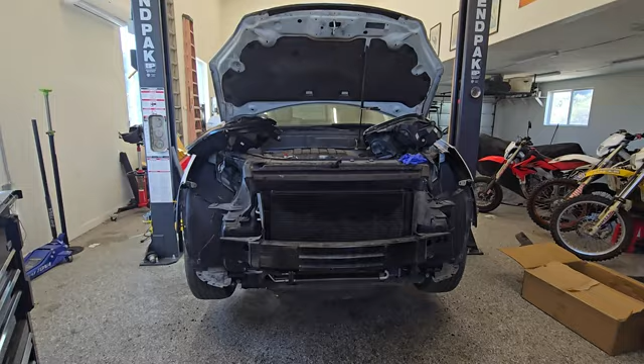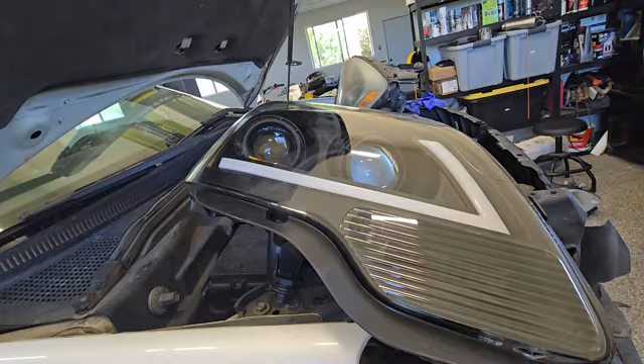This is a bit of an abnormal video for me, but I had a friend who does a lot of work, he doesn't have a lot of money, and he's got these headlights that are kind of beat, and he went and got himself some eBay lights. So I'm figuring eBay or Amazon or something like that, and I'm sure other people are going to try this.

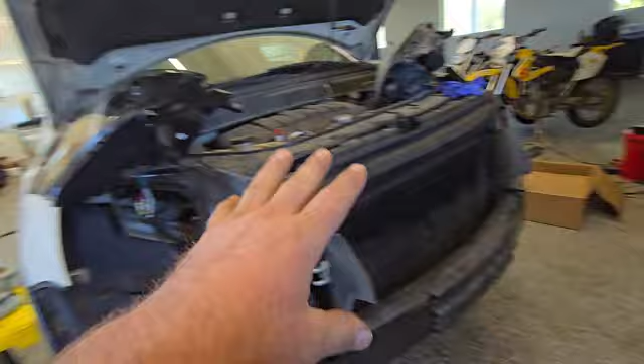Normally I wouldn't just do this and roll with it. If it was a typical customer, I'd say no, you got to get the right lights. But basically, the OEM lights are HIDs, and he bought these halogen ones.

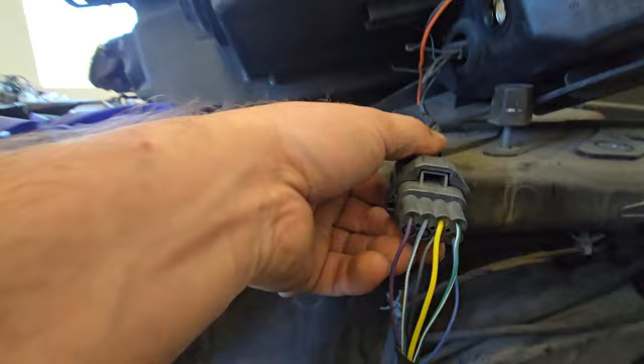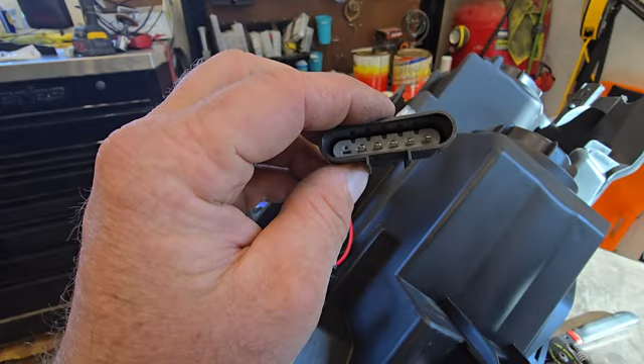So here's the OEM connection. See this? It's like 2 rows of 4 a piece, kind of a square connector, and that's direct plug-in. What he went ahead and bought was like this, and it has this connector, so that's obviously not going to work. It doesn't even have the same number of wires. It's completely incompatible.

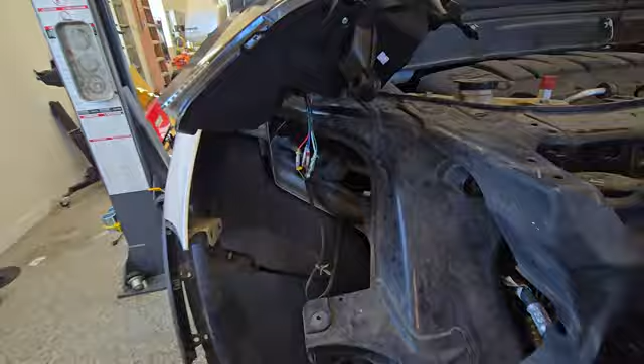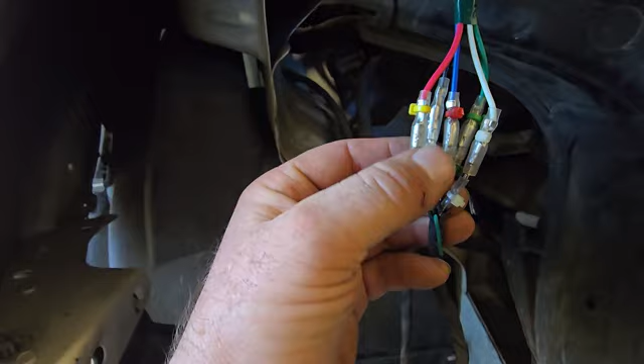So what I did, I'm not really saying I would recommend this, was I went ahead and figured out what wire does what, and I made my own connectors using Japanese bullet connectors like this, crimped them on, color coded them with a yellow zip tie, black to black, red to red. So you can see the colors are not the same. The aftermarket harness is blue, the factory harness in this case is black and white, I think it's actually a brown.

So I'm gonna walk you through how to do this, but what I'm gonna tell you is mostly just applicable to a 2011 or thereabouts GMC Acadia with HIDs. If you have these and they bolt right up, perfect. If you have some other GM model, these colors and terminal numbers can be different, okay?

So let me prove to you that they work. Here's the new one, wired up how I have it. Here's the factory one. I'm just gonna pop these back in. All right, and they do look nice. But replacement HIDs were like over $1,000, so he just went with what was cheaper.

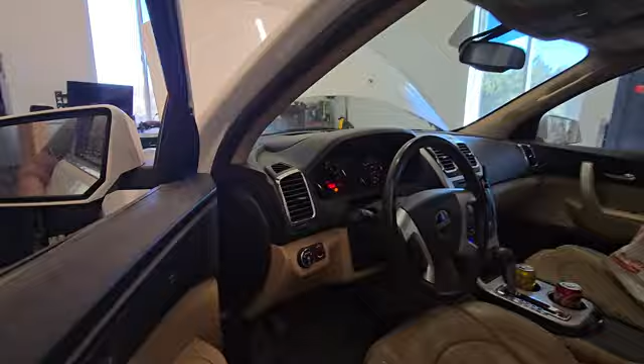So this is gonna be unscripted. I just do key on. So we'll start with low beam, so you can verify that the stuff actually works. Low beam factory, low beam aftermarket.

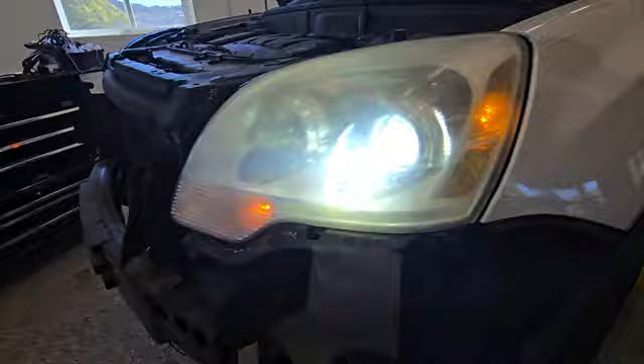It also adds this pretty cool running lamp. You can see the park light works. Park light's a little different over here. This one's a yes, this one kind of becomes illuminated and becomes the running light, but it will come on with the turn signal. Now let's do high beam.

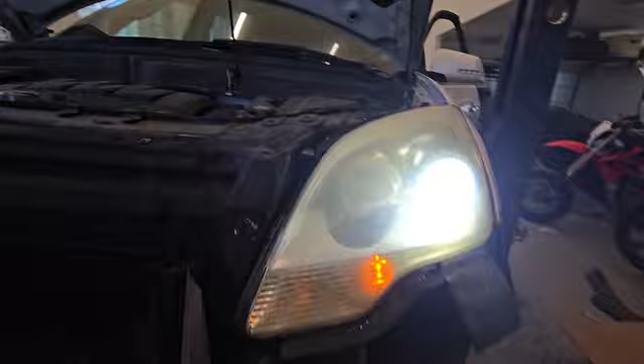You can hear that click. This has a solenoid type shutter. Okay, so now you can tell that one's got the high beam on. It's kind of interesting the way GM was doing this back in the late 2000s and into a little bit later than that.

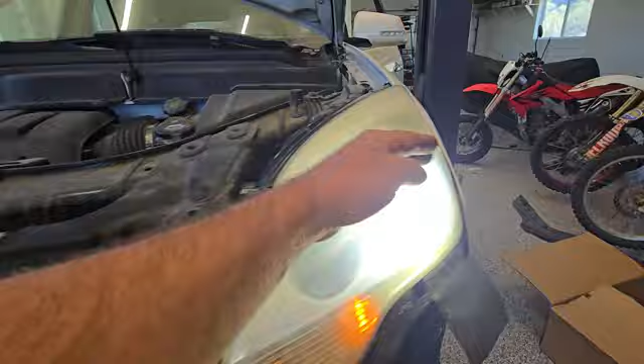Now we'll do right. You don't need to see the left turn signal, right? You trust me that it works. It's the factory harness here, so we're just going to do this right side. That's how your turn signal will work with this setup. It looks good. So GM used to do a shutter right here, that's what that solenoid action is.

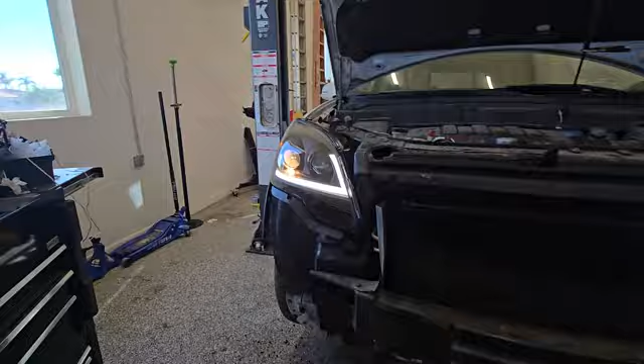So we're changing quite a few things here. So now that you've seen they do work, you can decide if you really want to get involved in this. I don't know, to be honest with you, I probably would have polished those and been done with it.

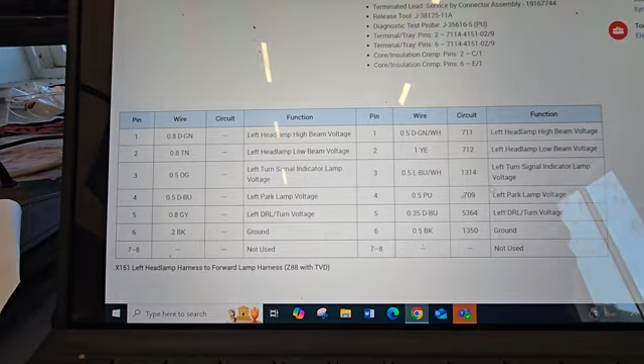However, let me show you how to do this. To really be able to do this right, you got to have some sort of subscription where you can get wiring diagrams. This is ALLDATA. So what I'm looking at here, this is the factory connector, right? So I can look at the connector, I can determine what numbers are what.

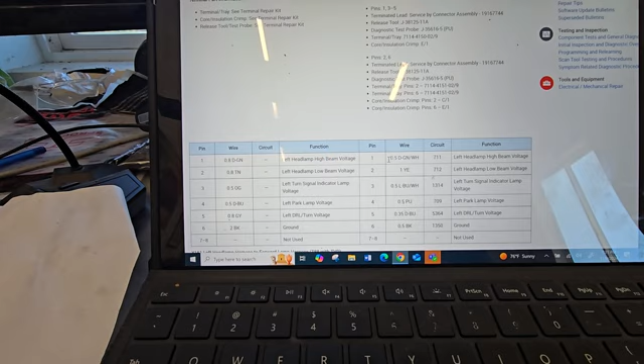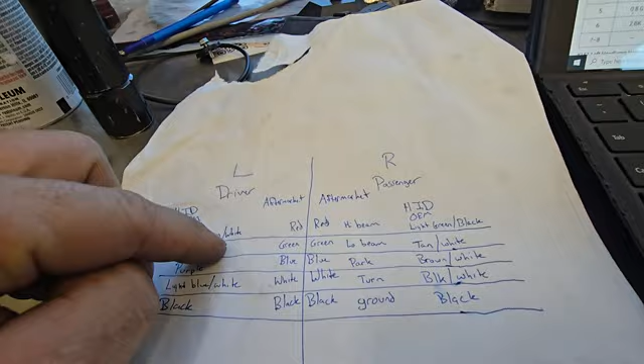And then, for example, if we started with terminal 1 on there, from the factory it's dark green and white, and that's going to give me the high beam, right? So I start making a little chart, and on that side, dark green and white, I know that that's going to be high beam, right? So here I made the left side and the right side because they have different colors. Some of them are similar, but they have different colors.

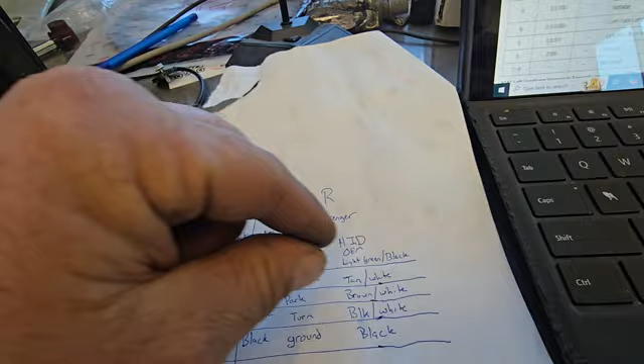And then I did the OEM and did the aftermarket. So how I came up with the green and white being the high beam was that whole top row is high beam. So on the passenger side of the right side, it's light green and black, but what I'm looking at right now is the driver's side. It's actually dark green and white.

And then from there, how did I know red? Well, I had to go, there's a lot of different models on this one. From what I recall, the X150 is the left side connector. 1, 2, 3, 4. Nope, that's not the one. You can see there's five different potential connectors. That's also not the one.

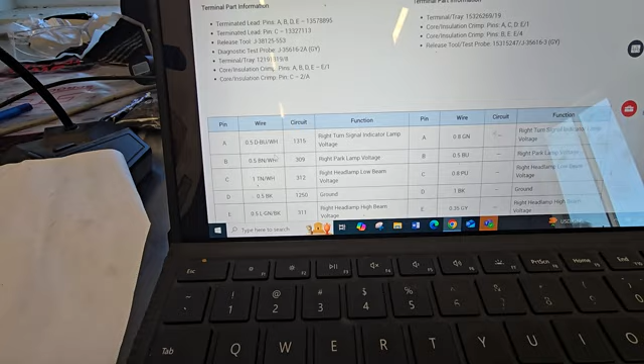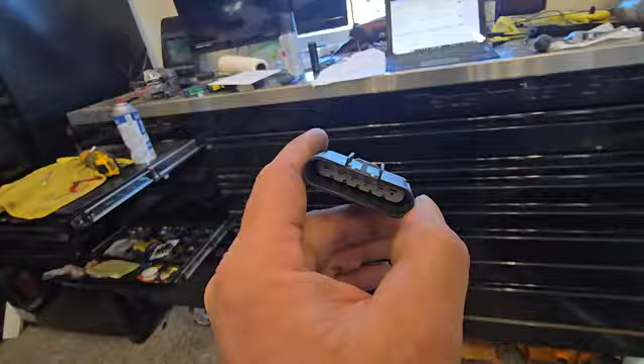I don't think it's the first one. Actually, yeah, that looks like it is probably the first one. So I'd look at this, and basically that connector I just pulled up would be the non-HID connector, which would be this right here. So from the aftermarket, that's why we can't have nice things.

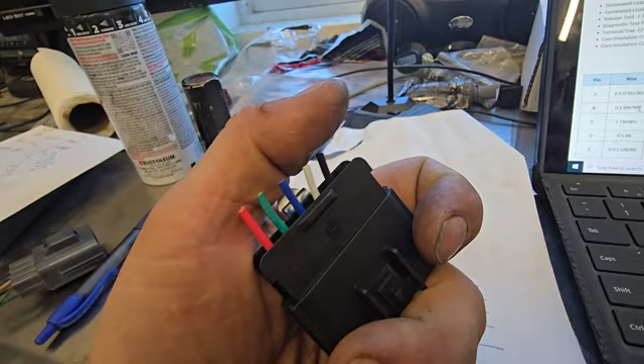From the aftermarket, they don't correlate their colors here. So you can't be like, oh, connect red to red, green to green, blue to blue, and white to white. You can actually connect black to black. But it was a little bit tricky to figure out what wire was going to have what voltage on it.

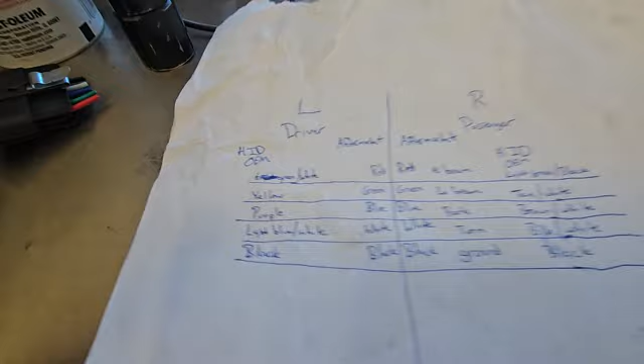So I did all this troubleshooting, and I've come up with this chart just to help you out. If you happen to have this connector right here, and those colors should match, what I'm going to tell you is going to be exactly right.

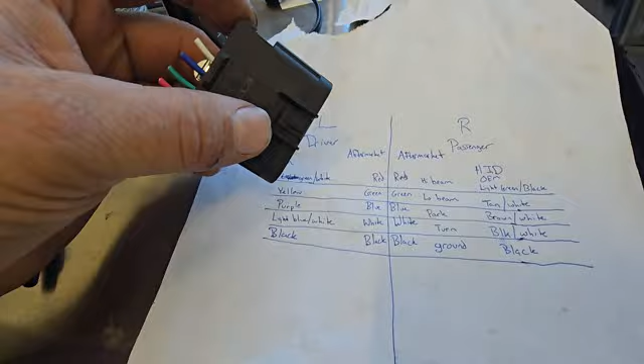And that's if you're putting headlights in that have this color. But generally, as a professional, we don't really rely so much on colors because colors can vary. What we know for sure is the positions would be right. So like terminal 1 or A, it happens to be red, but I'm also going to go by that, right?

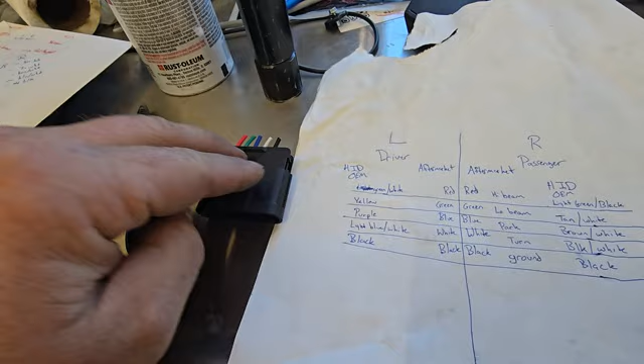So this is the headlight that he bought. And I don't have the OEM headlight because I couldn't pull the OEM colors because he doesn't have a vehicle with halogen lights. And then this is what actually came off the car.

So on the left side, green and white will go to red, yellow will go to green, purple will go to blue, light blue with white will go to white, and black will go to black. So that's your aftermarket. So this is this connector right here.

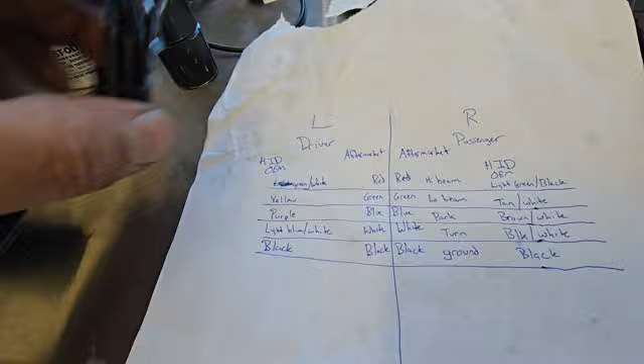And then I don't remember if this is the one off the driver or passenger, right? But these colors will correlate. I've done the work for you, so there you go. If it's a perfect match, I just made your life really easy.

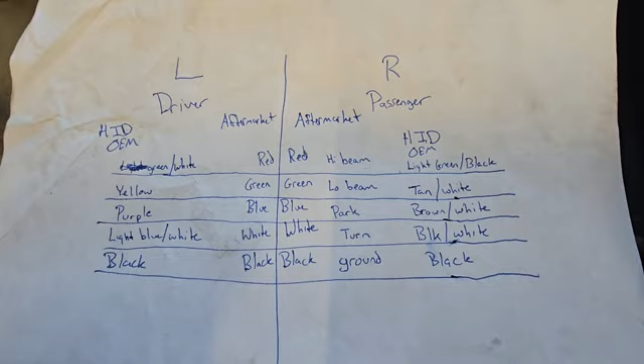If it's not a perfect match, like for example, if you bought headlights from eBay or Amazon or whatever, and these colors are not the same, you can take a look at these and you can probably figure it out pretty well because you can see what order they're in. Red, green, blue, white, black.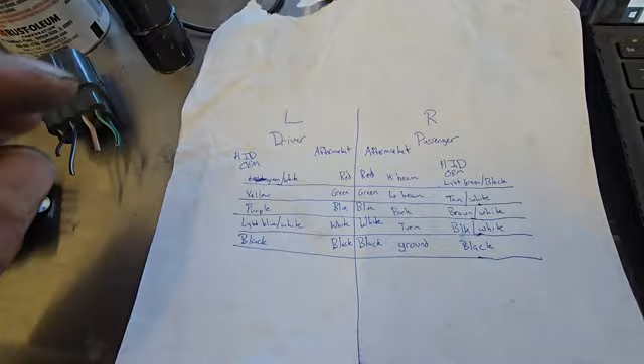Maybe they use different colors on your aftermarket ones. They're probably all made in the same factory in China. Serving people bowls of rice to do their all day worth of labor. It's totally a shame. So this stuff is all coming from China.

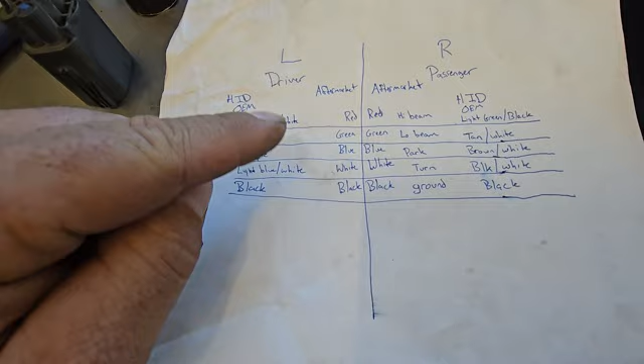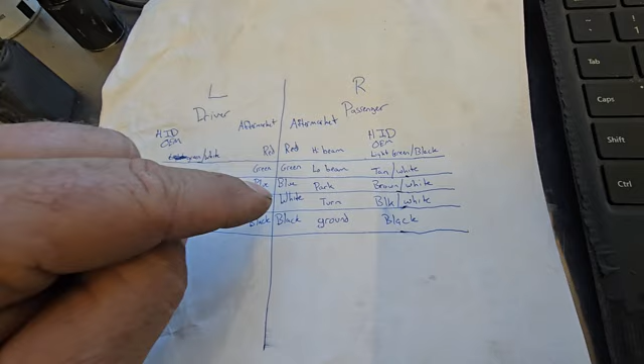But regardless, if you have something totally different, then this should be pretty helpful. From the factory, green and white would be high beam on the left side. On the right side, for example, light green and black become high beam, right?

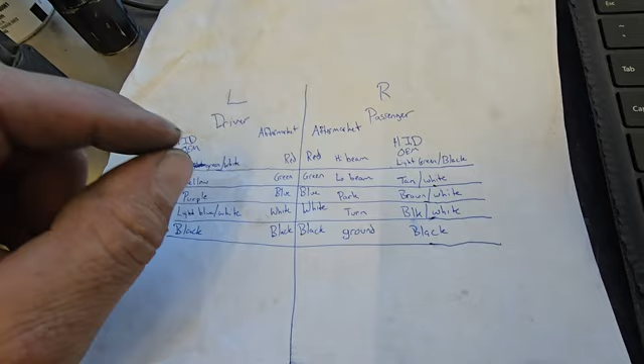So this is your guide right here. High beam, low beam, park, turn, and ground. That's all you need. There's one more wire, and it's for another part of the turn signal. So like one of these was turn signal voltage, and one of them is turn signal indicator, and you actually have to use indicator, right?

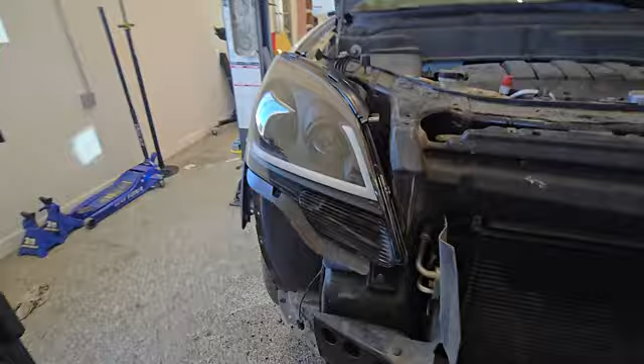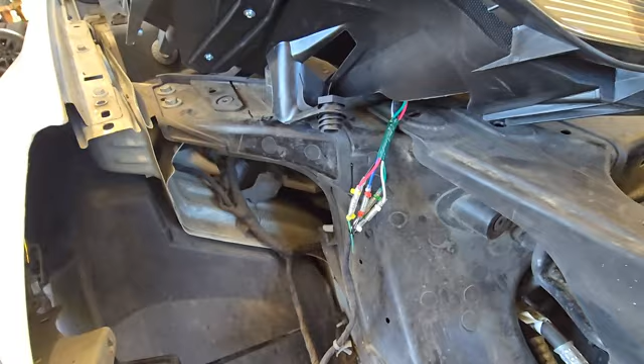So there's your guide. The way I would do it from here, let me pop this out for you. I'll do it non-pausing so you don't think I'm faking it. Because if you ask anybody, they're going to tell you this can't be done. I've talked with the company. I've done this a couple times for a couple different cheap people.

What I've done was like the red, I put a butt connector on there. I knew it has to go to green and black, so I just do like a male-female. I can probably undo this one-handed, I think. Actually, maybe not. But I'm just going to get those, like I put the male end on here, and I put the female end on here, and then it's just matching them up.

And then I went ahead and put the zip ties so you can't possibly confuse them. And eliminated the connector because I don't have any good way to have a male-female, right? But this is going to be watertight. How to do these connections, it's up to you. You could hardwire it, but I'd like to be able to disconnect them.

So I'm not exactly sure who this is going to help. If you're a homeowner, I probably wouldn't get involved in this. If you're at least fairly competent, I think you could do this. You make your connections how you want to make them. Worst case, do like a heat shrink butt connector, and you will have no way to disconnect and reconnect this, but it will work.

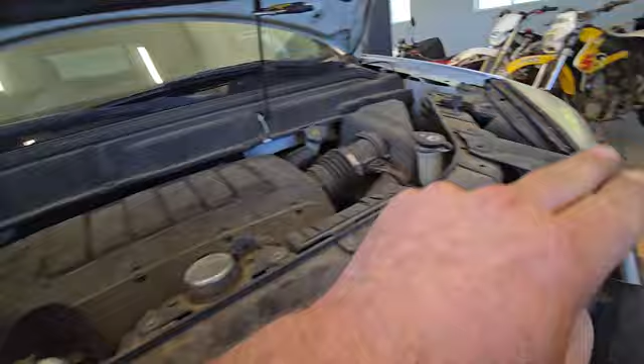Other thing I'd like to say, if you have HIDs, these are nice. I would honestly clean this and polish it. But if you're not going to do that, or like if it's broken or something, and this is a lot cheaper, these are okay. It's not going to be as bright.

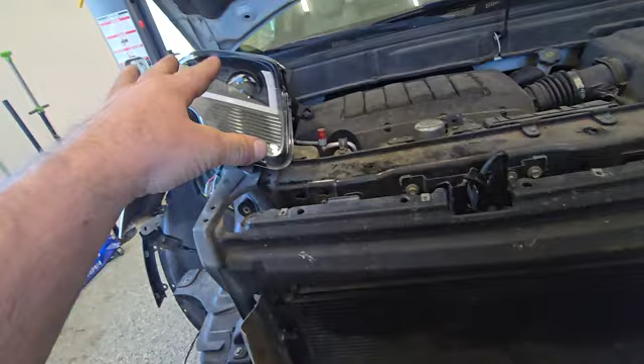I did it for another guy in a Raptor, and he was sort of like, hey, these lights suck. And I said, well, you went from high-end HID to like a low-end halogen. But at that point, you know, he just had to kind of live with it. All right, so hopefully this helps. Or hopefully it helps you decide that you don't want to get involved in this and you just buy the right ones that connect directly.